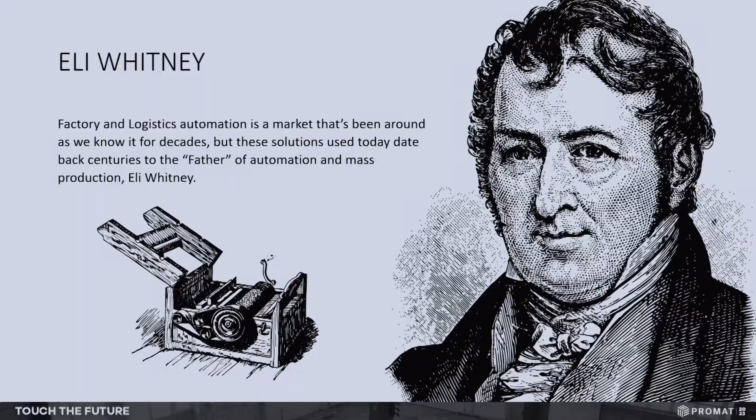So one of the first things I want to do is pay a little bit of tribute to a guy I've done a lot of research on, Eli Whitney. If you're familiar with Eli Whitney at all, he was kind of the founding father, if you will, of plant automation and innovation as we know it. For his time, he was born in 1765, so automation as we know it was well before the ones and zeros environment we live in today. Eli Whitney was a founding father of what we see today as plant automation and integration.

What was really interesting about Eli Whitney was his family, including his mother, never really wanted him to be an engineer, never wanted him to go to college. So he was over 30 years old before he went to college. He went to Yale. He died very young, only 59, but during that time, in my opinion, Eli Whitney was the genesis of what we see today from an automation perspective.

So as the person indicated, my name is Scott Matlock. I'm the general manager of the Logistics and Automation Division. We're stationed in Charlotte, North Carolina. We also have offices in Salt Lake and in Reno and kind of throughout the rest of the country. All of our business functions from our company are designed, built, supplied, supported, and serviced out of Charlotte. So there are 5 separate departments that are here to service you and to help you with items.

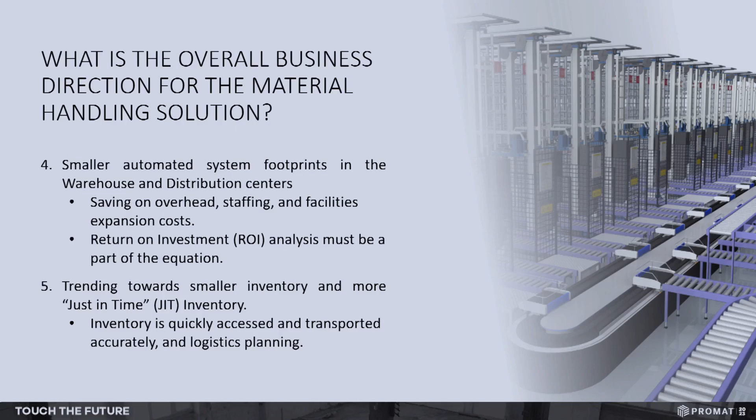Inventory management, as we understand now with a modern system put in place today, gives us instantaneous understanding of what's going on with our inventory. As soon as the box, case, or pallet comes into the system, the end user, the procurement team, and the people that run the inventory will understand exactly what's in their inventory, how they're going to use it, what kind of turns they'll have on it. Do we have stagnant inventory? Do we have inventory that's moving faster than we can keep it loaded? So with a modern material handling system today, it gives the company the opportunity to make some very prudent inventory and cost expense decisions.

As we see these systems becoming implemented and more widely used, the ability for inventory management and what needs to be done with that is a huge cost savings for an organization as well.

Additionally, with inventory management understanding is the just-in-time capability. A lot of companies that build products and services are looking for a just-in-time answer to their solution. They're looking for something that can get goods to person or goods to inventory in a timely fashion. So the just-in-time solution is another huge aspect we can offer from a material handling system upgrade.

Globalization - a lot of companies have organizations throughout the globe, throughout the country. With the globalization of inventory using a modern material handling system, this offers the opportunity for a company to make logistic decisions. If we have inventory in one part of the country, and inventory in another part of the country, and a customer somewhere in between, we can make an informed and intelligent decision based on shipping and availability for that inventory management.

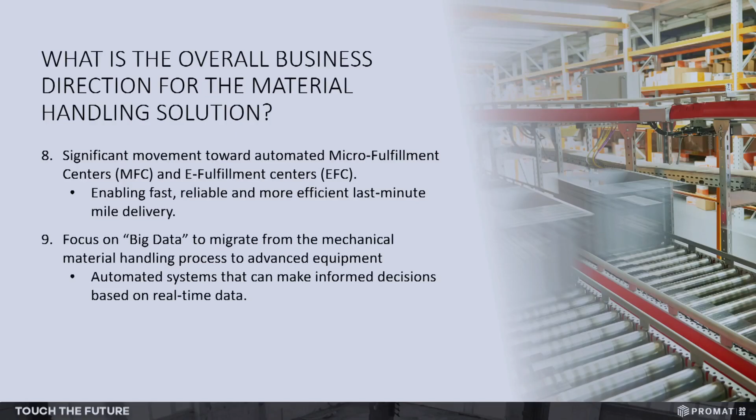Big data today is probably a very important part of the issue. We talked about being able to share data across the globe, across the country, across inter-company discussions, but we also now have big data. Once we understand what's in the inventory, it gives operations, procurement people, or the end user the opportunity to negotiate a little bit better from a big data perspective. If they have the data, the understanding, and the knowledge, they can make a better informed decision about what they want to spend, what they want to buy, and how they're going to automate their system. Big data is an extremely important piece of the direction we're heading in material handling systems.

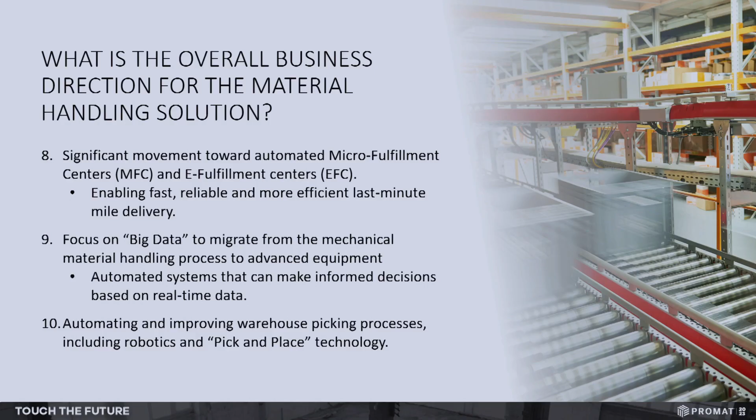Additionally, there are improvements in the picking system within a warehouse. We've all talked to folks who have problems getting their goods to outbound. If it's a computerized system and we can go in and understand exactly where the inventory is, it's a very simple situation to pull the inventory out of the system and deliver it. There are many things we can do today to help improve this, like a pick-to-light system, or any kind of system that increases and improves productivity throughout the entire process.

So as I wrap this up, what's the overall business direction? This is what we see based on the analysis and the input we've had - the direction the market wants to go, and the direction the market is heading.

So companies, as they start spending very large capital expenditure, start looking at implementation costs of handling systems, and they try to compare that to what the growth in the business is going to be year over year.

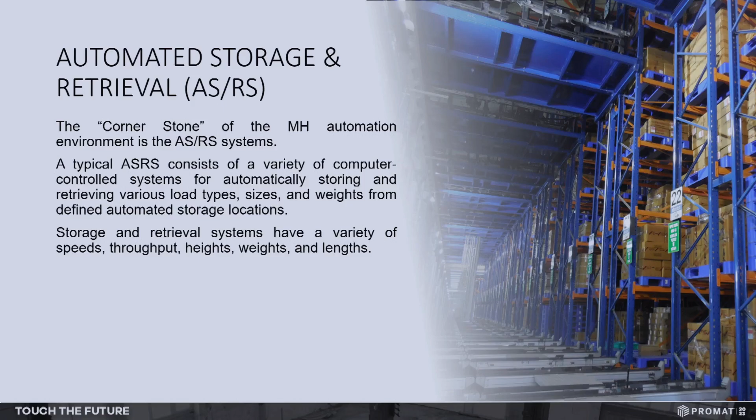A typical ASRS system is specifically engineered, designed, and supplied with some very specific coordinates. From our perspective in the business today, when we approach an ASRS system, we do it very open-mindedly. We don't start with a white piece of paper, but maybe just a little bit of gray on the paper. As our engineering group in Charlotte sits down, we look at specifically what the customer's needs are - their weight, throughput, time, space, et cetera. So as we design an ASRS system, they're not totally one-off systems, but they're very specialized as we build and design them.

Some of the pros about a system - if we looked at the pros and cons analysis, which I think is extremely important as we sit down with people and try to give them some knowledge about whether an ASRS system is for them, whether they can afford it, whether they want to expend the time and energy.

Some of the pros about the system: extremely high density - we can put a lot of stuff in a small space. Typically we see around a 65 to 75% increase in warehouse space in a location that had a legacy warehouse operation where we've installed an ASRS system. We've seen between 65 and sometimes even more than that increase in operating space.

Some of the other pros, certainly reduced footprint and operational safety - I think this is one of the areas we really spend time on when looking at ROI analysis. When we go back and do research on how safe that company is, we can talk about the safety of a system. We eliminate some of the legacy warehouse management and capabilities with an automated system that has virtually no safety issues whatsoever - virtually accident-free. The system is fairly automated.

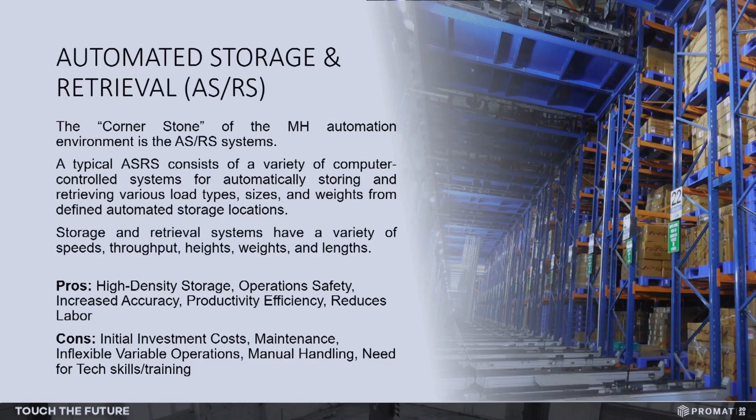Now conversely, let's talk about some cons. There are some significant cons to the system that we all have to overcome. First and foremost is the initial cost. As we know, a modern ASRS system or material handling system is by far a capital expenditure - it's not something we can go in and hope they've got a couple hundred thousand dollars left over in the budget for this year. Historically, these systems will be long-time engineered, long-time manufactured, long-time installed, so there's a lot of cost associated with them.

The maintenance and flexibility, the variation in the operation - sometimes it takes a while for a company to understand how to incorporate this into their maintenance methods.

We need to have some skilled technicians. One of the things we recommend to end users that invest in an ASRS system is to take some of the legacy warehouse people and give them an opportunity for retraining, to move into another position or get more technical training. So those are some of the pros and cons and a little information about an ASRS system.

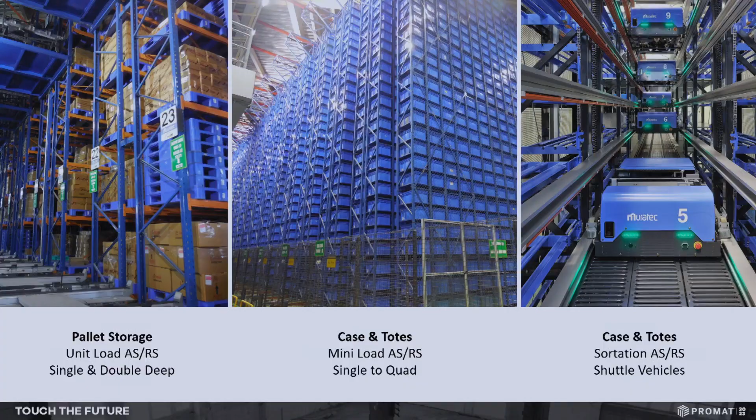ASRS systems are basically broken down into three pieces. We have the unit load system in the market today, and it's pretty much universal. A unit load system brings in pallets worth of product and stores it. It can be anything, from dog food to computer pieces, whatever.

So the typical ASRS system, we can store... A unit load system is a pallet-driven system. Historically across the board, trying to stay agnostic, if we look at all the suppliers and manufacturers that build unit load systems, it's about a 7,000 pound load capacity. There are a few instances where they can go to a 15,000 pound capacity. Generally the height is anywhere from 19 feet to 131 feet, very specific about where a unit load system could work, across a good cross-section of environments, from minus 22 degrees to ambient. The speed varies based on throughput and weight. So that's the typical unit load system.

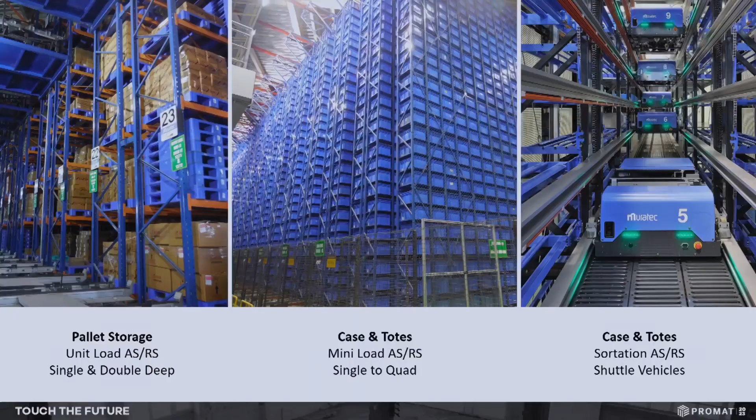We can get them in single deep or double deep, whatever the case may be. The mini load system, as you see in the middle, we talked earlier about high density, and as you can see by this photo, extremely high density. This is one of the places we see significant improvement in footprint. We can bring the system in and go pretty high depending on the capability of the warehouse facility, but very, very high density. We can put a lot of stuff in a small space.

Historically, in a mini load system, which is a tote or box system, the maximum weight is typically about 220 pounds. Again, it can operate in a very varied environment, from about minus 13 degrees to ambient. So pretty broad spectrum, very fast, very high density storage.

And then the last system is a unishuttle system. Unishuttle systems today are extremely high speed. The applications are generally designed for people who want specific sequencing of their system, from storage out to an outbound pallet or goods-to-person setup, or something like that. But very much sequenced storage. The typical unishuttle today is a two-way transfer, meaning we use the same shuttle to put away as we take out.

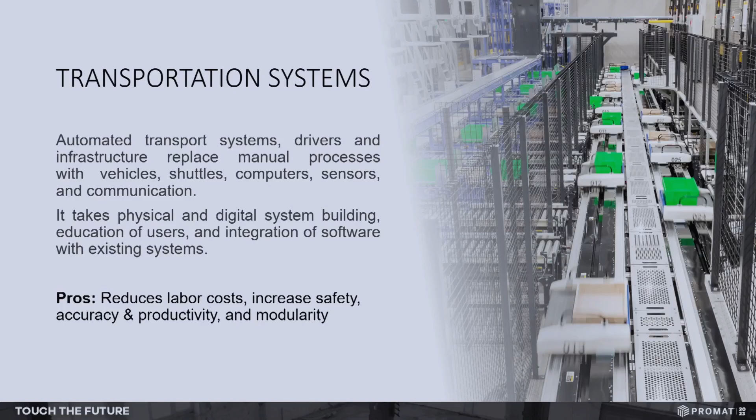One of the other extremely important things on the market today is transportation systems. Transportation systems generally mean AGVs, automated guided vehicle systems. Extremely low maintenance, very good overhead cost, very easy to adopt, taking a legacy warehouse system for moving material around and adopting it into an AGV. Frankly, we see that the AGV market today is probably the most predominant market in the field, and the AGV systems are probably the most requested from us.

As I've talked to people in the industry, that's the direction most individual warehouses and companies are moving toward, starting with the AGV. Our philosophy is let's start with the AGV and then take a look at what's next, and what's next after that. If we can automate something costing a lot of money, overhead, and maintenance expense, let's get an AGV or transportation system in there and then move to the next levels past that.

These are really easy to integrate into an SAP system or a warehouse management system. They're fairly seamless and easy to move from there. Now let's talk a little bit about pros and cons. Talking specifically about some of the pros, which I always like to go first: it dramatically reduces our labor costs. We have a lot of overhead for legacy warehouse systems, and we're trying to reduce that overhead cost.

It's easy to move around with an asset. I want to make sure I get a lot of the information here. The cost of the initial investment, once again, it's a capital expenditure investment. It's pretty expensive to get started.

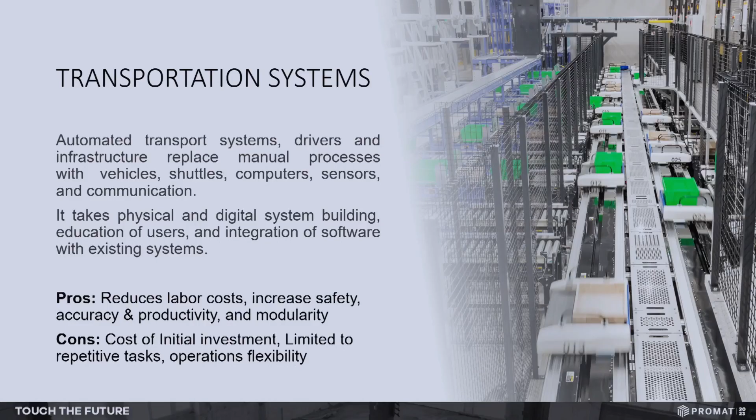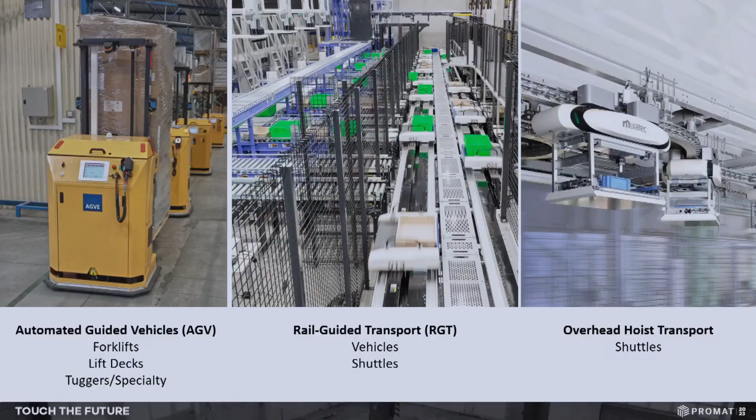So here again, we have basically three different kinds of systems that are available on the market today. We see the typical AGV system as you see here. There are rail-guided transportation systems. And historically I would go into this, but I really want to give you guys some time to have some discussion, and then the overhead transportation system. So from a transportation system in the market today, we see that these are kind of the three main cornerstones: AGVs, some kind of a rail-guided vehicle, and then the overhead system.

So let's look at a couple of examples real quickly. I want to give you a couple of examples of customers we've interfaced with and tried to help out from a project and a product perspective from a material handling standpoint.

JetBlue, one of our customers, came to us with an interesting challenge, as every customer comes with an interesting challenge. They were building a new 100,000 square foot building facility. They wanted to be able to easily access parts, critical parts within their building. I don't know if anybody's ever sat on the tarmac waiting for a part to come for an airplane. It takes a while for that to happen. One of JetBlue's things was they wanted that time frame to decrease substantially if they could. So they asked us to help them.

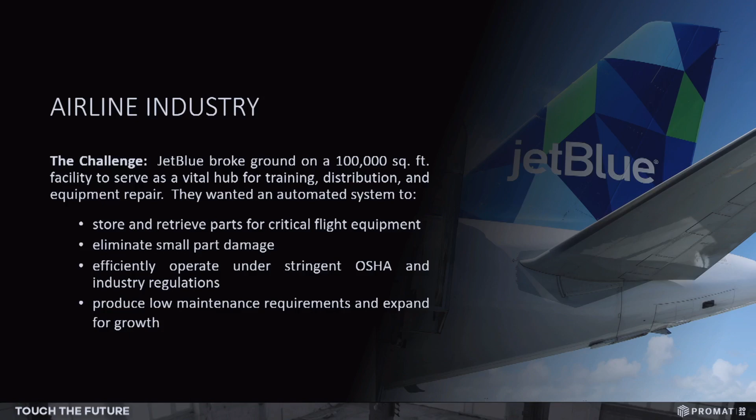They wanted an ASRS system that would dramatically reduce their small part damage. Once again, some of the parts that they use are very fragile. They wanted to try to eliminate some of that damage, and something that was very low maintenance, something that could move pretty quickly.

So here's kind of what our solution was for the system. We put together and installed a single aisle mini load system. Now this particular system, they wanted 2 cranes on it. They wanted the single aisle system, but they wanted some redundancy. In case one of the cranes happened to be down for maintenance or repair, they wanted to have a backup system, so that's what they put together.

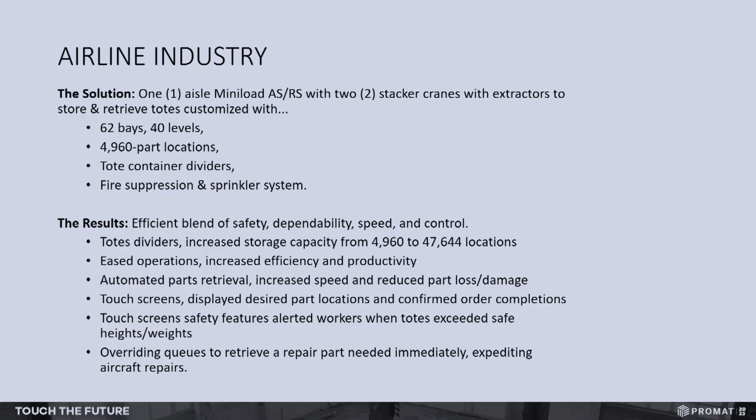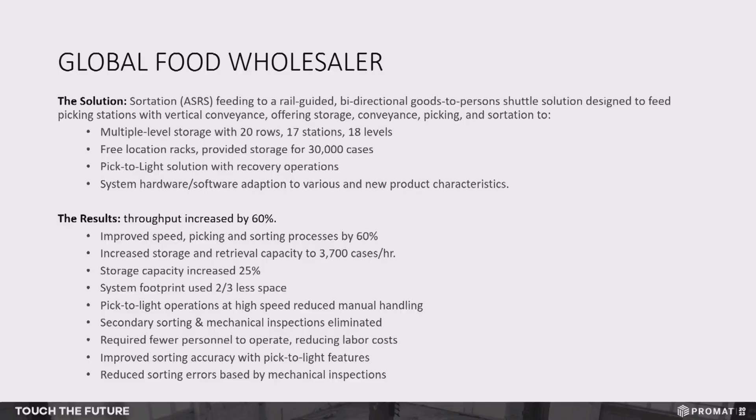So now I want to talk a little bit about how do we justify these systems. What do we do from an ROI perspective? You know, certainly the first question out of most people's mouth when we put together a system is, what's it going to cost me? How do I justify the cost of these systems?

I apologize, I'm moving kind of fast because I want to give you guys some opportunity if you have questions.

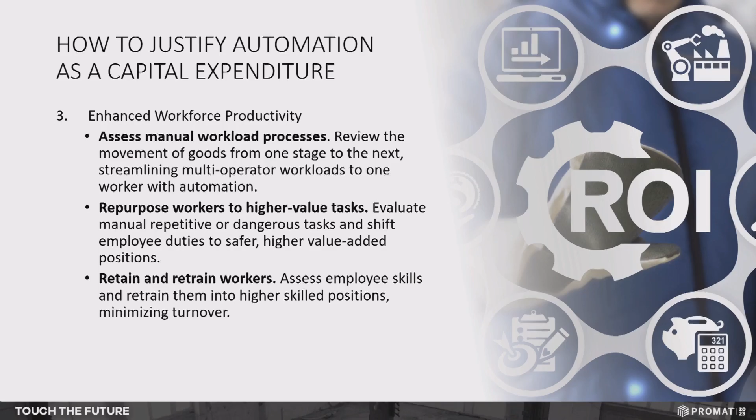Better inventory tracking, we talked about. So, some final thoughts. These systems are designed and built to help the end users manage and move their inventory. That's really the entire focus, the entire genesis of what we're doing. We don't have any other thing that we're trying to do with them.